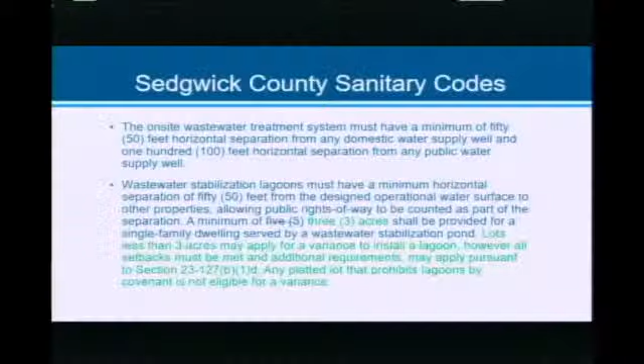So with this piece, if we have commission concurrence, as stated earlier, we would get this on the consent agenda to go ahead and send it to KDHE in this form. We would wait for their review, and once we get that back, we would still need to set a public hearing and hold the public hearing since it is a code change.

Okay. Oh, Commissioner Howell, sorry. Yeah, thank you, Chairman. There was a discussion about surface water, use of surface water. Where are we on that topic?

That is in the code that we updated last cycle. We changed that verbiage a little bit. We didn't specifically say that you are not allowed to use that. We just said that any source you use for drinking water has to meet all KDHE and MABCD standards. So we made sure we didn't specifically rule out, by name, any specific source, but the standard will rule several sources out. Unless, of course, you were to install a treatment system on your property.

All right, if we are ready to move to the mechanical code. Yes, we are. We will do that. So ready to propose adoption of this code with local amendments.

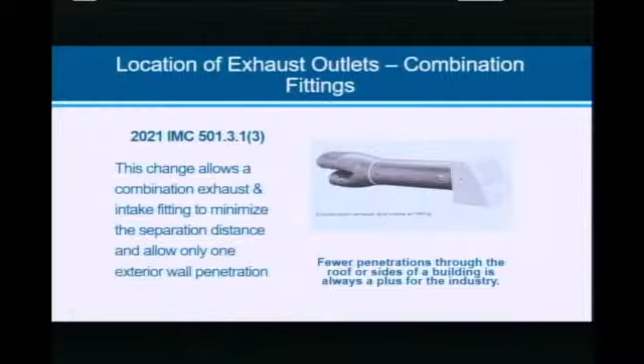Access doors - this is specific for grease terminations, or grease hoods, for cooking operations. The code now requires this. The board took a long look at amending it. It says access doors have to be within 3 feet of the horizontal termination, which would allow you to clean out those grease intakes and inspect them from the interior.

In the past we have not required that. The thought of amending that out was there because it does somewhat increase the cost of construction, but further research identified that it then saves quite a bit of money on the maintenance side, and it's also a lot safer because these are ones that get an annual inspection from the fire department. So you've got maintenance workers, firefighters, etc.

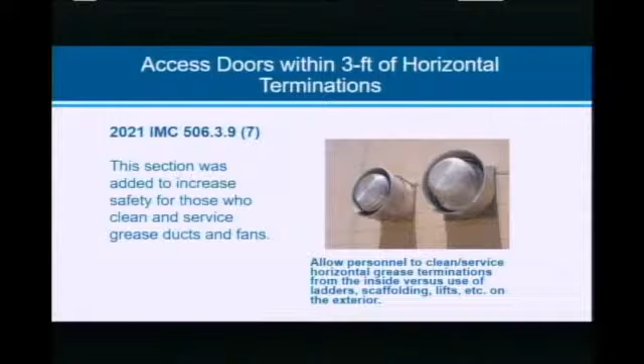Otherwise, especially if this is on the 3rd floor of a building, they would be up on scaffolding, up on ladders, trying to clean out and inspect from the exterior of the building. In the end, we found that for the purposes of safety and overall long-term cost, it actually does save money. So we kept that in the code, did not amend it out, but that will be something new that we start requiring.

This one is also in the baseline code. It's mainly a clarification and cleanup of the language to ensure we maintain compliance, based on the added number of vents that many buildings now have. New text was added to address the possibility of dryer exhaust air being introduced into the building's interior.

The code has always said there has to be a 3-foot separation, but in the example you see with the picture where there's a ventilated soffit and different areas, the code language previously had not really caught up with all of the vent options you have, so it was easy to miss that in design or in the build. This helps clarify that - like in the example here, you can maintain 3 feet from all of those areas, or where you've got a ventilated soffit, if you needed to be within 3 feet of that, you could close that portion of the soffit.

Previously, there were usually only vents in parts of soffits, but a lot of the soffits now, the whole thing is vented. So that requires us to ensure that we account for that.

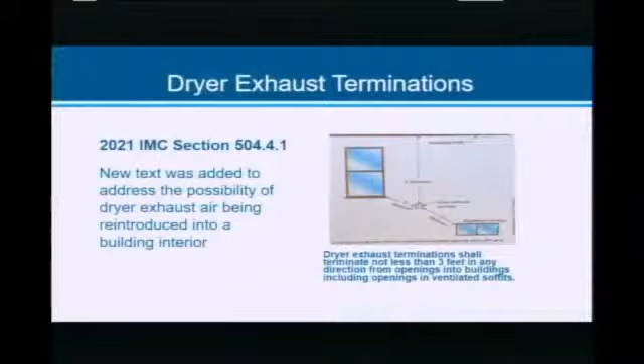I'll pause there for any questions that we have on the mechanical code.

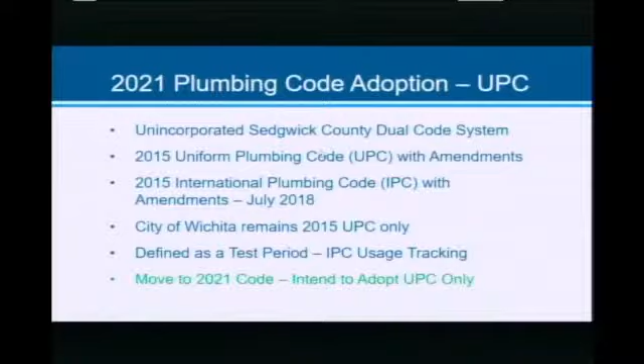All right, brings us on to the adoption of the 2021 Uniform Plumbing Code with local amendments. This is a slide you saw last time at a staff meeting, where we discussed that we have been on a dual code system in the unincorporated portion of the county. That is a bit to manage. The IPC, while a lot of it, we were not seeing a lot of permits pulled under it. The usage did not justify the amount of resources that we and the industry were putting toward this.

So we are requesting permission to adopt the 2021 UPC only. That is in the form of Article 3 of our UBTC. This moves us from the 15 to the 21 code. Again, a lot of that was the issue of having two codes. This is an International Association of Plumbing and Mechanical Officials, or IAPMO, code. Now we're back to one code. We're not doing much that the industry is not familiar with, but it will be a pretty significant shift in practice as we go back to this.

The list, as you've seen before, of codes that we ensured are compatible with.

Speaking of a significant shift, what we currently have in place is a 2015 UPC with 31 amendments. We have an IPC with 28 amendments. Of course, a lot of those amendments are to help make those codes compatible.

In the international code system, the fuel gas code is separate, and the residential code covers a lot of plumbing. So those residential amendments were in place since we had UPC only in the city, as well as availability of UPC in the county. All of that boils down to a 2021 UPC with 64 amendments. A fairly significant amendment package, but all in all, not much different. The combination hasn't grown a lot with amendments, is what I'm saying.

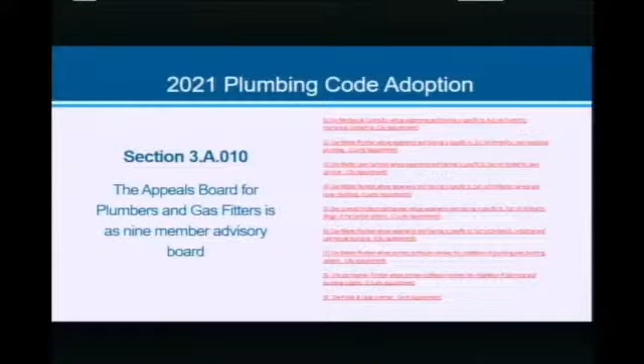The first one, which I think everyone is aware of, is the fact that we had changed the board in the not-so-distant past, that will be incorporated in the code, so nothing too significant there. This next one is air admittance valves. In cases where it's not structurally practical to vent a system, usually in a remodel, the IPC has always allowed air admittance valves. We actually had this as an amendment in the UPC, so those have been combined and that will stay.

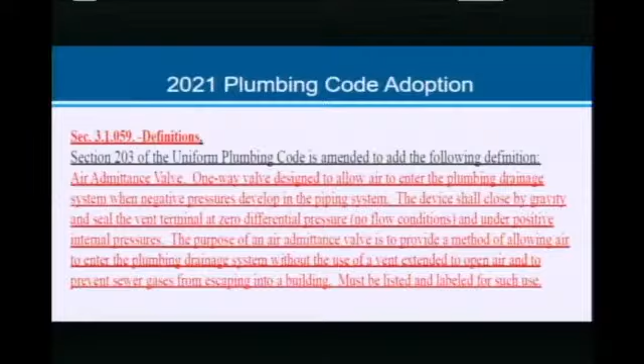And then we also see more on air admittance valves later in the code. But this allows us to keep that where practical.

And again, where a vent is not practical, mainly applying to remodels. Another one to point out: dead legs, and one that combines the two goes together. This is where you've got pipe where the recirculation is not happening much, or you can have stagnant water in there. So we try to reduce those as much as possible. And in a case where there needs to be a dead leg that is longer than twice the diameter of the pipe, it has to be accessed in order to flush it. Just trying to make sure that we keep contaminants out of the system and don't have a breeding ground for bacteria.

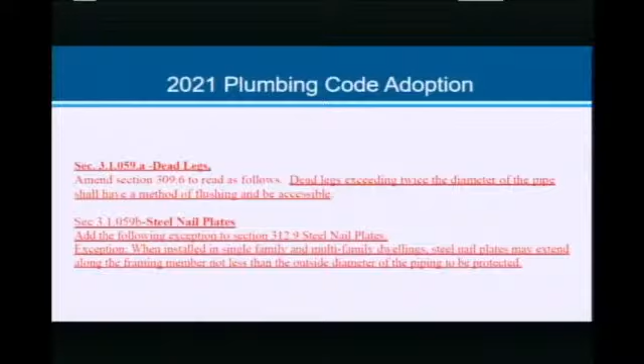Nail plates. So this is actually one where the IPC, the international code, is more restrictive than the uniform code. It requires a larger nail plate and is a little more restrictive there. So again, that has been brought together and amended to allow for a smaller nail plate and use, so then especially usually comes to play in residential. So we do have the allowance for the smaller nail plate option where that makes sense.

Drainage connections. So this is relating specifically to dishwashers and the way that their discharge is connected. This amendment allows the option to use either the international or the uniform plumbing code, which take a fairly different approach to that. So again, the option for each, and then it eliminates a UPC requirement that would require those same standards in a domestic dishwasher. So it removes that, allows it just to not be quite as restrictive, and then that also keeps us in line with Kansas Department of Health and Environment and state standards, because hospitals, schools, anything with state involvement is done to the international code, so that keeps them compatible there.

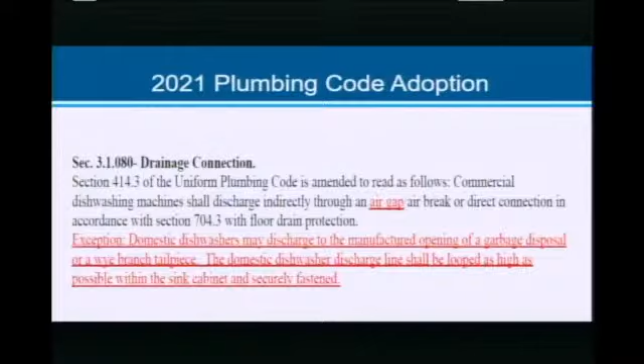On to seismic provisions. So this is again not necessarily unique to either code. They both have a little bit different approach to the way that they handle seismic. Our main play here is that we are seeing a little bit of an increase in seismic activity in the area, and we just want to make sure that that's properly covered. So there are stipulations to ensure that water heaters, etc., are strapped, and that there's drain pans and areas to get the water away from them if something was to happen to them.

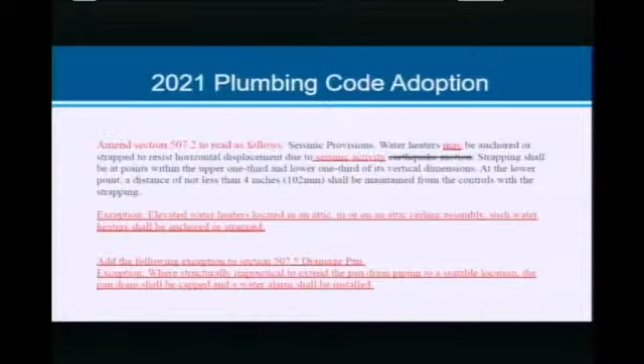And this clarifies how we're going to handle any of those that are elevated. Also has some stipulations there because, of course, if you've got a water heater in an attic, the pan setup and the drain a lot of times have to be a little different there. So it does give some options that if you can't drain that properly, you could drain it into the pan. If you can't get the vent drain away from the area, you could drain it into the pan. In those cases, you need to have a water alarm. Pan protects the home, water alarm lets you know there's a leak. Type scenario. I know that gets a little deep and pretty exciting.

But Jason really likes this stuff, so he's not the only one. I think I saw Lonnie's here too. So we've got a few people, and hopefully I'm doing some level of justice to the technicality of their code here. But you livened it up with the curiosity on the dead legs. Oh yeah, yes. I didn't, anyway. Yeah.

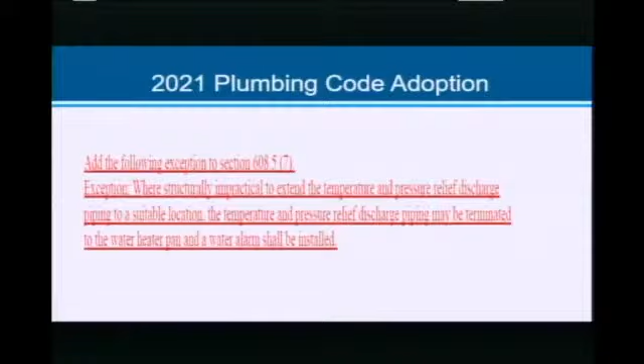So next one here, we're talking temperature and pressure relief vents. So this is an allowance for those T&P vents as per the IPC, a little bit less restrictive in the amount and type of materials that are used, and then it also allows that in cases where it's not structurally practical to vent that hot water completely away from a water heater, you would be able to vent it into the pan. And yet, again, if approved and if it works, you could go that way. The significance there is, of course, if the hot water heater ruptures, you've got very hot water coming out of it. So that's the significance of trying to get that vented away, but it's just not always practical to do. So the code accommodates that when it can't be, and gives you a way to get it down away from it and down the drain.

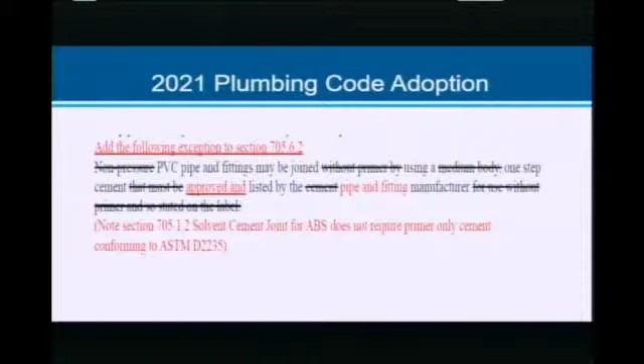Next one here, we have sealant along with glue associated with our pipe and fittings, and this is very simply the IPC-related amendment that allows for one-step cement. So obviously a little time and money savings there, often called blue glue. This is just that, it's a one-step sealant.

All right, commercial sinks, discharge of commercial sinks, IPC. The bottom line is this allows us to use both, ensures that it accommodates what we have existing, so that we don't make a code change that puts things we've approved for the past several years out of code. This ensures we've accommodated what we've been doing, and it also accommodates both IPC and UPC, giving us some IPC allowances. Another significant part of this is to ensure we're in line with what KDHE looks at in the field.

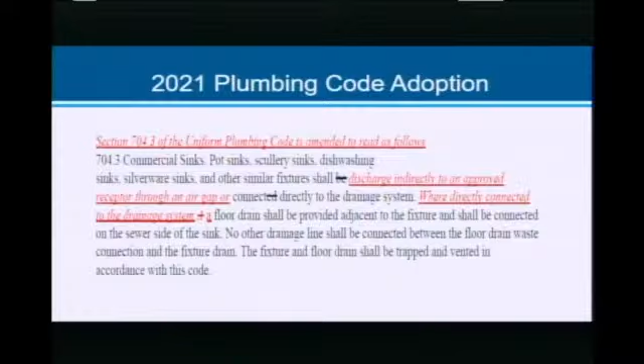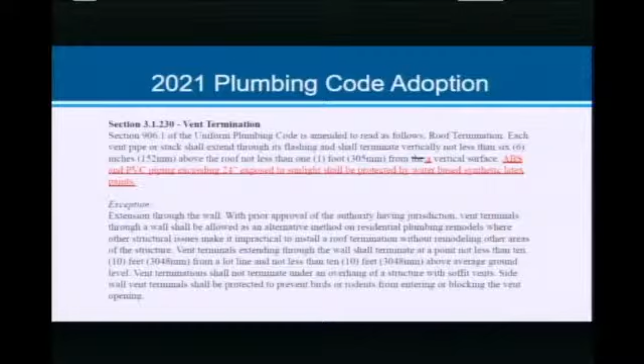All right, I think we're about there. So, vent terminations. Bottom line with this is if you've got pipes exposed to sunlight, and this is not unique to either code, both codes right now say that any PVC exposed to sunlight requires a UV protectant. We make that less restrictive. We say only if that pipe is 24 inches or longer do you require UV protection. Otherwise, you're safe to not protect it. Obviously you still can if a builder sees fit.

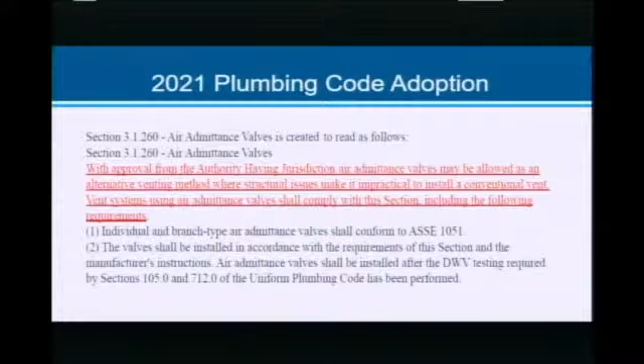Getting us back to the air admittance valves. This did not just stop with the use of a valve in cases of remodels, it addressed it fully throughout the code. So this now expands it across our code and allows, when it makes sense, when it's structurally not feasible to vent the right way, air admittance to be used in new and remodeled commercial as well as new residential. That is something the UPC did not allow prior, so this will be a new allowance, especially for the city, that can be utilized where it makes sense. Fairly significant one there.

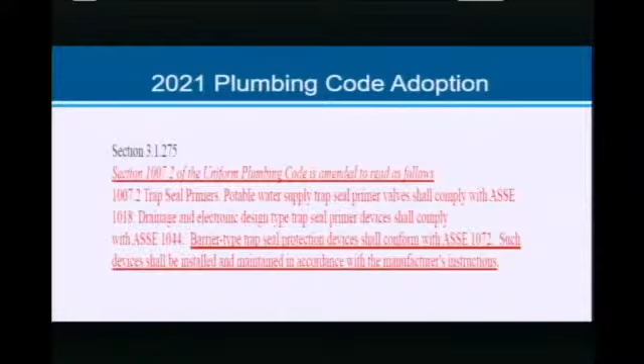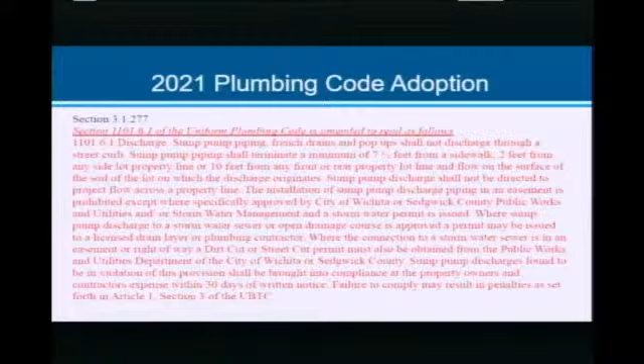And then last one here, again this has nothing really to do with either code. This has everything to do with public works infrastructure, which will mainly impact the City of Wichita, some areas in the county that are on city systems. This has been a policy in place for some time that simply controls where curb cuts can be made, where your sump pumps, French drains, anything like that can be drained into the city system, and the way those connections are put into that system. We find it important, especially when enforcing this, enforcement doesn't make nearly as much sense if it's a policy of ours versus actually being in the code. So this will now be code rather than policy from here on out. I think that gets us through all of those.

Okay, Commissioner Howell.

Thank you for the presentation. Thank you, Chairman. First thing I wanted to ask is, you mentioned that the Builders Association has been part of this discussion, and they are supportive of all these changes, and they're okay with going in this direction?

Correct. Okay. And then I'm thinking back to the arc fault discussion. For years we opposed amending our electrical code to mandate arc fault devices in Sedgwick County, and eventually I think the builders just got tired of the discussion and decided to concede their argument. So we went in that direction, but thinking back about it, I wasn't really thinking that was the right thing to do at the time, but we went that direction because we just kind of got tired of it. So I feel like that's where we are today with this discussion. For the most part, I have to say I appreciate the thoughtful way we're trying to make the UPC a better code. So first, let me just say thank you to the board members, and thank you for making very reasonable amendments to the code that I've been talking about for a very long time.

I'm trying to think if there's a few things here that you didn't mention today, so let's go through those real quickly.

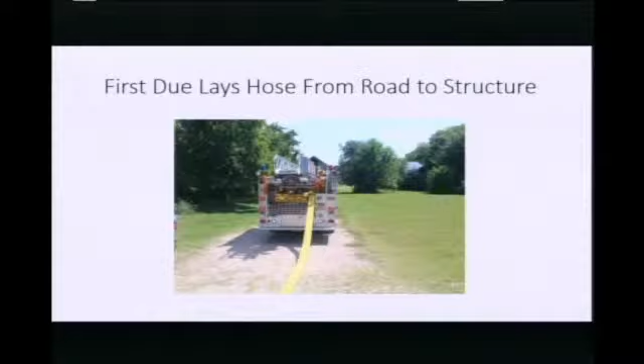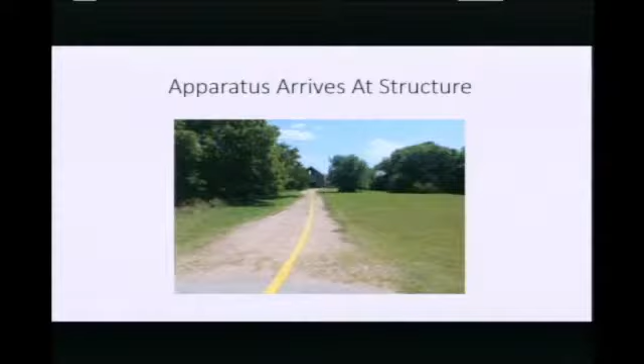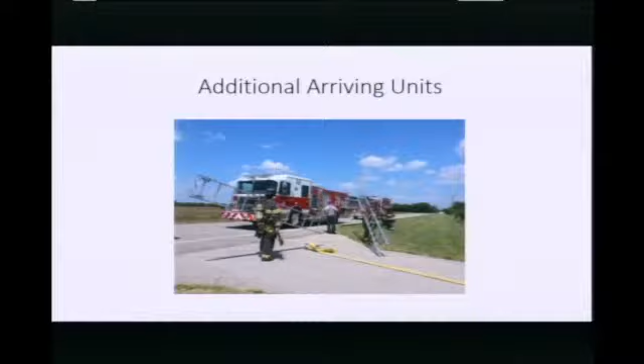So that's one of our struggles with reducing the driveway widths, because what a lot of people don't think about - the first-in engine lays that hose with 3 people, and everybody else is going to end up out on the primary road, and all of our fire attack and rescue men and equipment are going to be packing their stuff the length of that roadway if it's too narrow to take other apparatus down.

So this is what a scenario would look like if we don't maintain a road width that we can get secondary apparatus in there. The interior attack and rescue crews would be carrying their hose and all their equipment 500 to 600, maybe 700 foot.

So one of the things we talked about is, where does this change for us? We had a code in the past where the 20 foot was for residential, say a farmstead, but once you went past the farmstead, if they had accessory buildings, it could be a 14 feet drive after that point. But in that stretch, they have to have what I call passing lanes - some people call them turnouts - so that trucks could meet and pass each other.

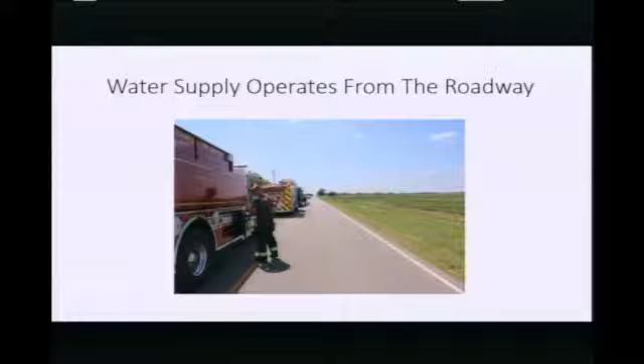So what we did when we looked at this was say, if somebody wants to build a quarter or half a mile back, we're only going to lay hose up to 600 to 800 feet. Once it's beyond that, we're not going to drop that hose - we're just going to have to take all the apparatus to the scene, and then it's just a matter of our tender trucks passing each other. So it wasn't such a big deal to have the 20-foot driveway.

We could narrow the driveway because the hose wasn't going to be on it, but we could put in some passing lanes to where those trucks could pass each other coming in and out, or an EMS unit that had to get in or out could pass the fire trucks.

So where we went with this, through the discussions with WABA, is if a home is going to have hose laid up to 800 feet, 600 to 800 feet, and if the home is going to be built within 800 foot of the roadway, we wanted to maintain the 20-foot road. That way, for our firefighting and our crews, we can get the hose dropped and get the trucks there. Past 800 feet, that 20-foot width is not a big deal to us because we're not going to lay the hose.

So we were willing to compromise and say, okay, we're okay with 14 foot as long as they put a passing lane in every 500 feet so that the trucks could pull over and pass each other.

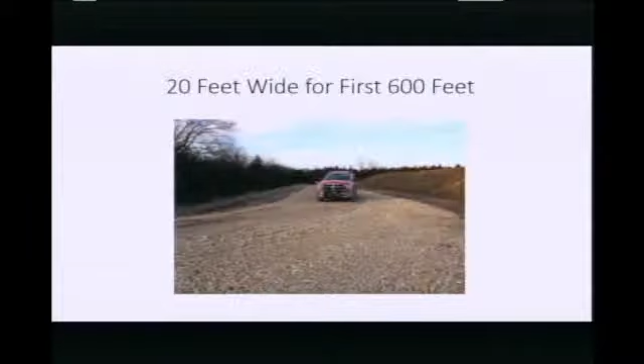Once again, we just threw this in here because this was the scene we were at. This turned out to be a mutual aid call. We went in by Rose Hill, and you can see that in the bad weather, we ended up with trucks stuck right there. So there is a real important value to having a solid surface, good road, and the only chance we get to get the road right is when they build.

Because in a residential structure, there are no inspections or code compliance after the original build. A business, we go out and inspect every year. Residential, once it's built, it's done. We can't go back two years later and say you need to fix this or that, because we don't have any real authority on residential.

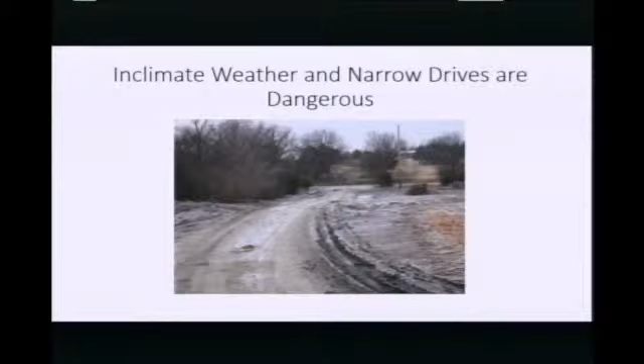So anyway, here's the end, and here's the changes that we worked with WABA to go from the 20-foot road. We're still maintaining the turn-in, we've got to keep the turn-in radius, but our changes that we required...

...or worked with WABA and BCSA to compromise on is if the home residence is built 800 foot or less than 800 foot, we want them to have 600 foot of 20-foot driveway. That way, when we lay hose that 600 to 800 foot, we can get our other trucks within 200 foot of the building.

If you build beyond 800 feet, whether it's 802, or 900, or 1200, or three-quarters of a mile, you can build the 14 foot. Once you make the turn-in requirements, they can take 14 foot all the way for that half mile, as long as they have what I call passing lanes—in the code it's turnouts.

As long as they have the passing lane turnouts every 500 feet, then we'll allow it 14 foot after the required turn-in the rest of the way.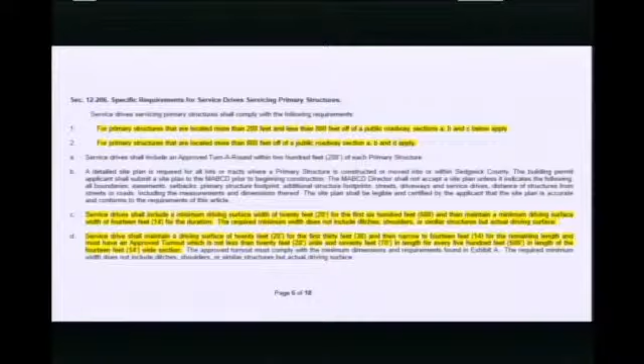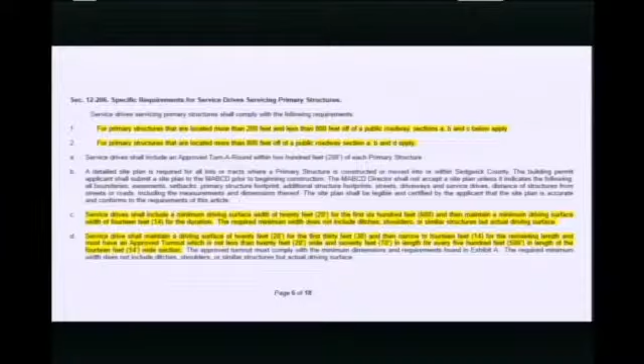And we also, the new International Fire Code required the 75,000 or 76,000 compaction ratio, and we took that out and left it at the 46,000 compaction ratio that's in the current code. So we did not upgrade that. That was one of the things the builders were really concerned about.

And I think that's the changes that we're recommending.

Okay, Chief, I know you've been really looking at this. It's nice to know that the last time this was really looked at seriously was in 2004, your original statement, so I'm sure it's time that this needs to be updated. So thank you, looks pretty good to me.

Commissioner Howell? Thank you, Chairman. Just, so to reiterate, we're simply saying that for the first—trying to read this paragraph again—so the 20 foot is still going to be required for the first 600 feet.

Only if the house is less than an 800 foot setback. If you're a half a mile out, it can be 14 foot after you get past the turnout—it can be 14 foot if it's more than 800, because we're not going to lay hose. If it's more than 800 foot, we're just not going to drop that hose because it's too far.

So when someone builds a new driveway, it gets inspected and signed off to these standards. Once that's done, is it ever re-inspected? Is there ever any type of requirement to maintain these standards?